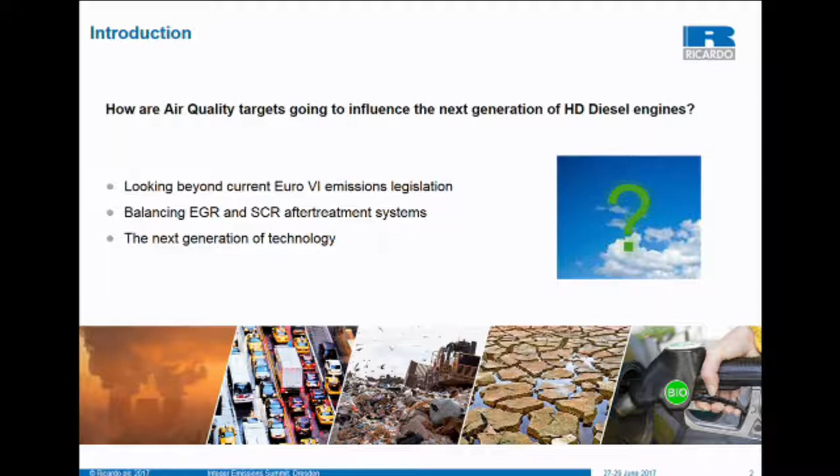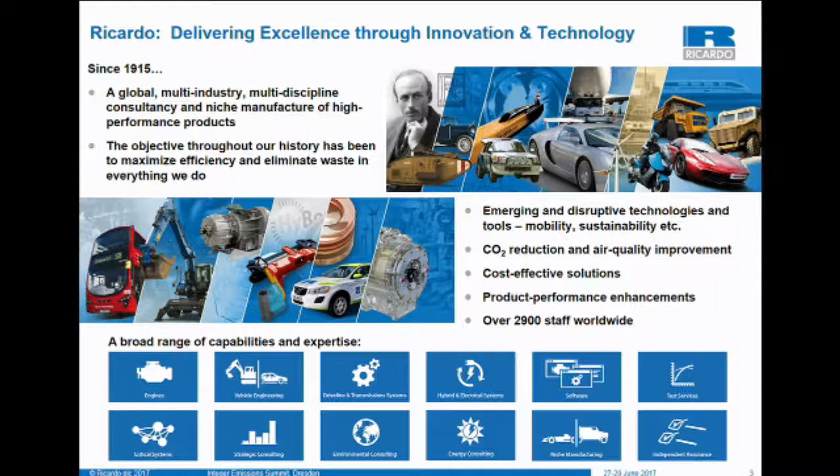So over the 102 years the company's grown somewhat, now nearly 3,000 staff worldwide, and we don't just focus on the traditional consultancy of engines and vehicles and transmission design development. We've also covered environmental and strategic consulting, for example. And throughout our history, we've focused on delivering these innovative solutions for addressing the global problems of energy, transportation and scarce resources.

So let's take a look at the current air quality legislation, current situation and the challenges it presents for the heavy-duty sector. So it's well known that poor air quality is harmful for human health. So within Europe, several thousand deaths every year are attributed to pollutants such as NOx and particulate. So it's a very real problem in the developed world. And it's not just human health that's impacted by these pollutants, but the wider environment as well.

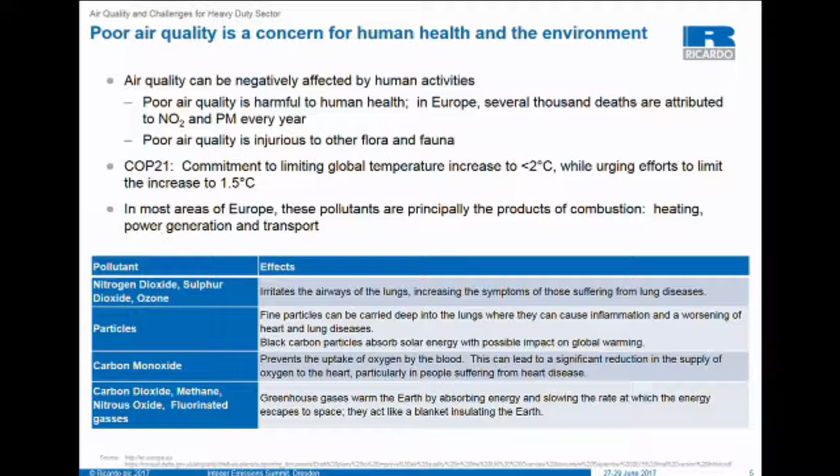Coupled with that, we have the COP21 agreement, which is an international commitment to limit the global temperature rise, and with that will come some greenhouse gas regulations. Clearly, recent announcements by President Trump to withdraw will have some impact, but let's assume for the sake of this that there's some commitment from the rest of the world to keep going with that. In most cases, these pollutants are principally the product of combustion, so the sources are heating, power generation, and transport.

So within Europe, there is air quality legislation in place to deal with this, as we're all aware. So the air quality legislation for Europe has specific local concentration limits for NOx and particulate, and failure to comply with this can lead to penalties. Additionally to this, there's the EU National Emissions Ceiling Directive that places upper emissions limits on the total national emissions for a range of pollutants, and that's expected as well to be further revised in the future for even more stringent reduction.

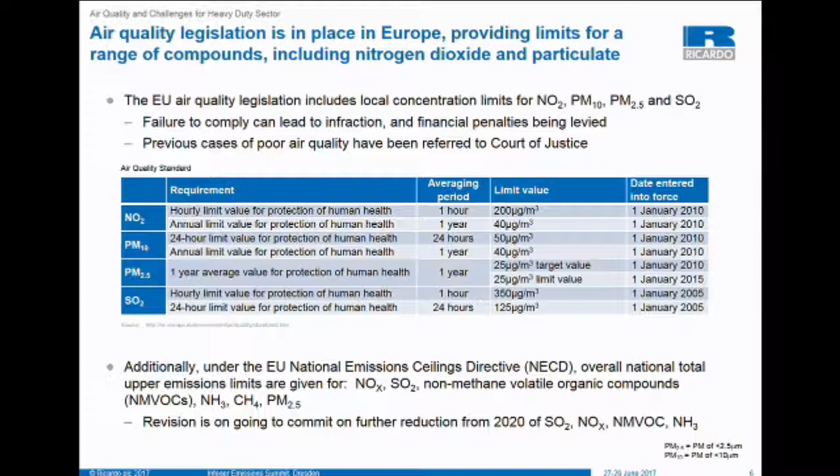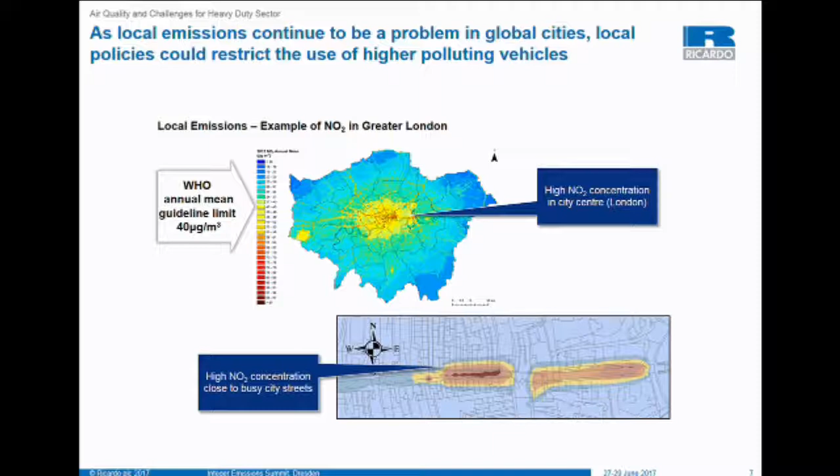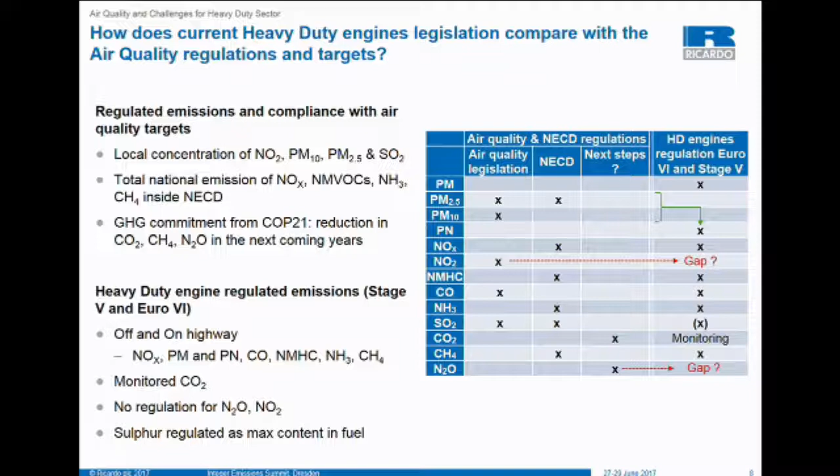So with that in mind, we have a view that future regulation could lead to further NOx reduction and potentially focus on NO2 specifically for heavy-duty vehicles.

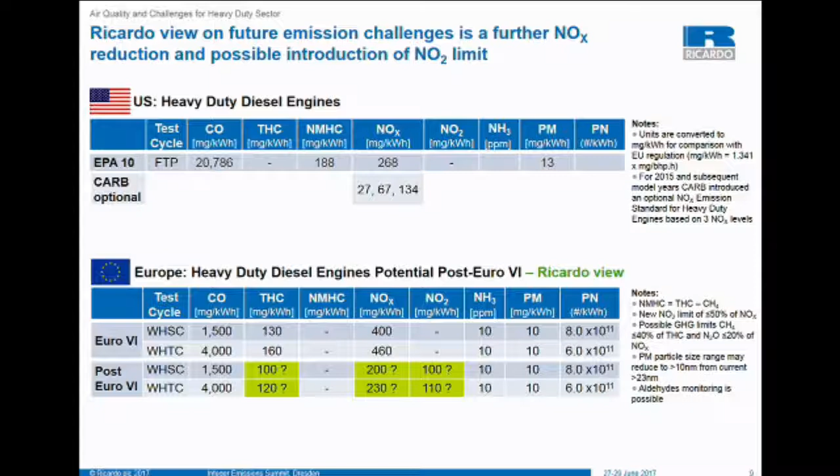Taking that on board, we've been considering what technologies may be required to provide the emissions solution for engines beyond that current Euro 6 level, and looking towards that CARB ultra low NOx level. So I'm going to present some of the ongoing research now.

So it gives you some clues to the type of technologies we may need to look at to address that, whether it's better control systems or advanced dosing systems.

Also within the FTP cycle, similar to the NRTC, the cycle starts from cold, so there's a warm-up period, through which the SCR system isn't able to function efficiently, and therefore there's a risk of higher NOx emissions during that period. So clearly, future technologies that look to reduce that warm-up time would be beneficial, as well as other technologies that may seek to trap the NOx during that cold stage.

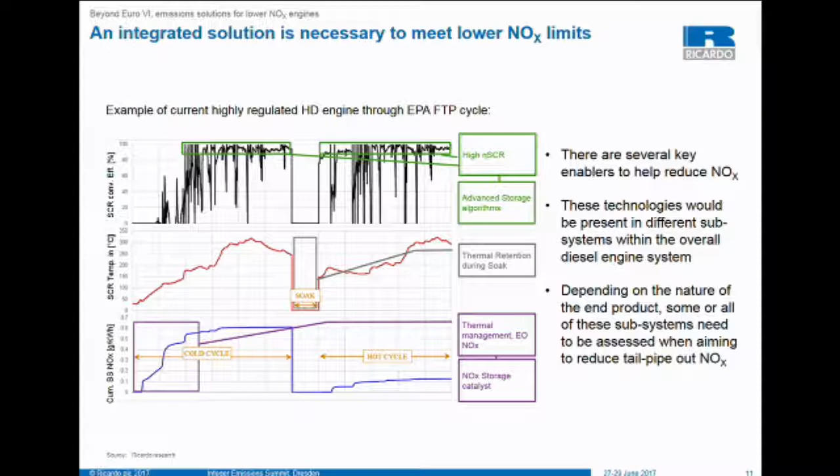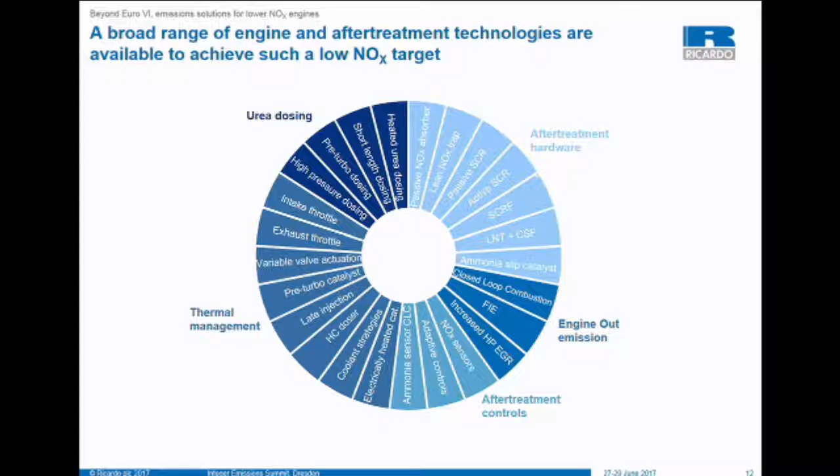So there's a broad range of technologies out there, ranging from further reduction of engine-out emissions through after-treatment and dosing technologies to improve their efficiency, as well as thermal management and controls to deal with the variable nature of the cycle and providing optimum efficiency at any given point.

At Ricardo, we've been researching many of these topics, and we're able to present here some of the more promising technologies that we see to provide a solution for the ultra-low NOx levels that we're projecting.

I'm going to tease you a bit here, and present some technologies that are part of our ongoing research, but it's not at a stage yet where we're able to present the results and the details of the specifications. So it's just a taster, and in the future we hope to be able to present some real results about how these have performed.

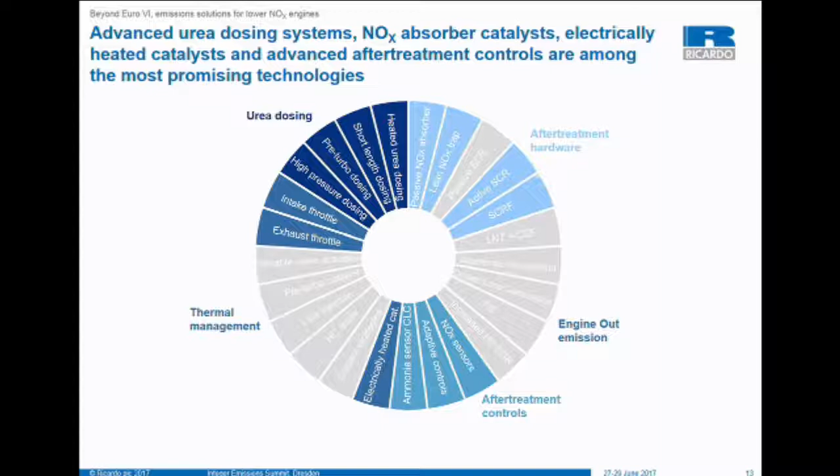Firstly, we've looked at an after-treatment system. It takes a more conventional Euro 6 type system of a DPF with SCR and ammonia slip catalyst, but introduces a couple of key new elements. Firstly, we've included an electrically heated catalyst, similar to the type of product that Watlow have presented at this summit already. The objective of that system is to use electrical power to heat the exhaust flow prior to the after-treatment, such that it reduces the time to heat up the exhaust gas and the SCR to the optimum temperature.

There is an energy penalty for providing that heat, but we're projecting that it's actually a very efficient method of thermal management compared to some other methodologies, and it can provide a significant increase in NOx conversion through the cold portion of the cycle.

The next new element we're considering in this case is a lean NOx trap. This will be used, in low temperature conditions, to trap the NOx, and then we'll need periodic regeneration. It has the additional benefit that it also has an oxidation functionality, so it can displace the DOC.

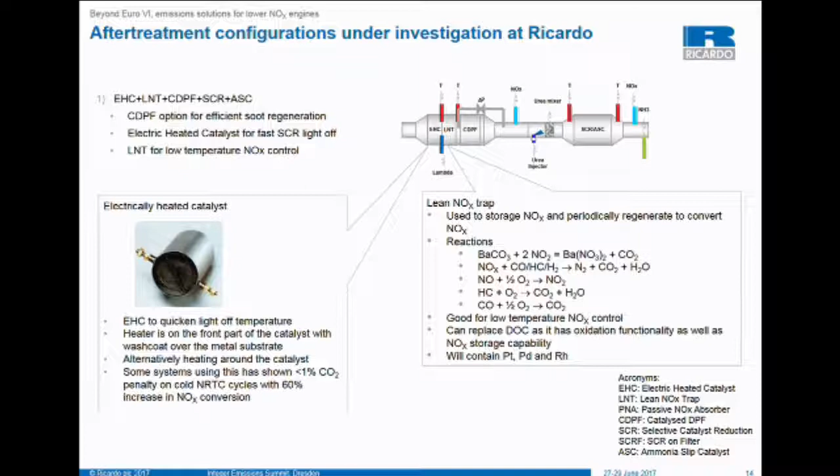The second system we're looking at retains the electrically heated catalyst as well, but now uses a passive NOx absorber. This device will store the NOx during low temperature operation and then release it at higher exhaust temperatures, allowing the SCR system to deal with the NOx more efficiently. Again, this has the opportunity to displace the DOC in terms of oxidation functionality.

In this case, we're actually also testing it with an SCR on filter rather than a DPF followed by SCR. This provides the added advantage of bringing the SCR system further upstream in the exhaust and exposing it to higher exhaust temperatures.

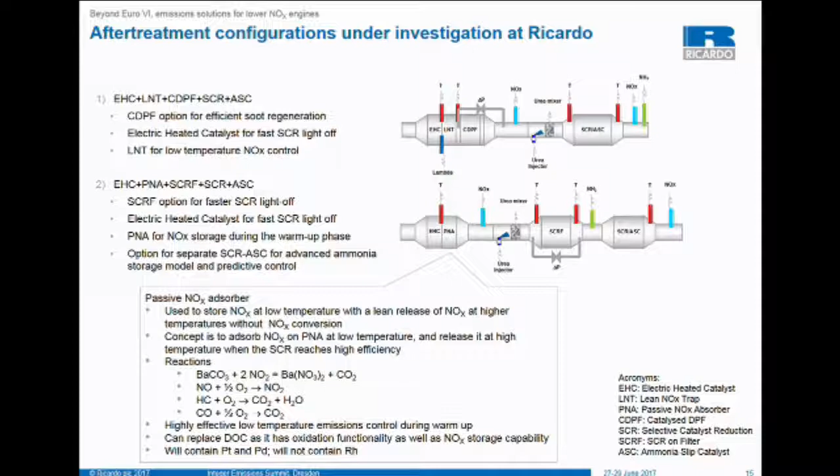The third after-treatment system we're looking at is a more conventional, more simplistic SCR-ASC system, but we've closely coupled it to the turbine outlet. The benefit of that is it reduces the heat loss prior to the SCR system to reduce the warm-up period.

But it requires the urea injection pre-turbine, which gives the opportunity for excellent mixing of the urea in the exhaust gas flow. This could be a very compact and lower cost system than the others, but obviously may not be the most practical in all applications where it's not possible to closely couple the SCR system to the turbine outlet.

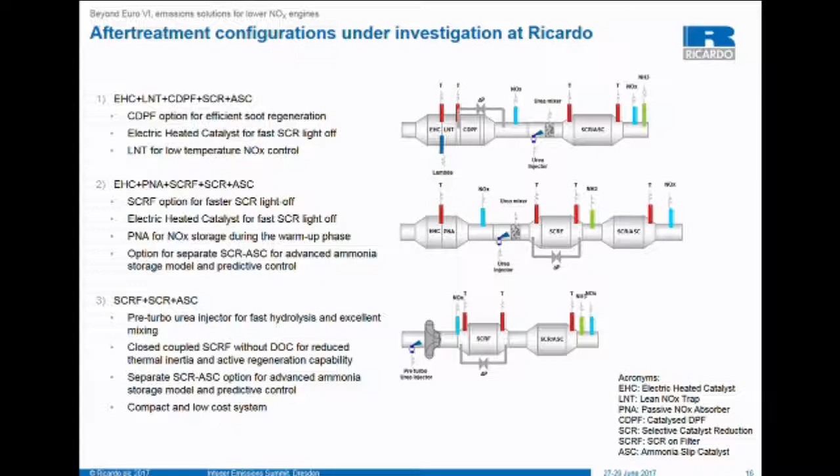We're also looking at advanced urea dosing systems, which include heated dosers, high pressure dosing, as well as alternative geometry dosers that seek to reduce the length.

I guess the overall objective between these systems is to improve the speed of the hydrolysis reaction, and also reduce the overall system length, again reducing heat loss, so that we can present at higher temperatures to the SCR quicker.

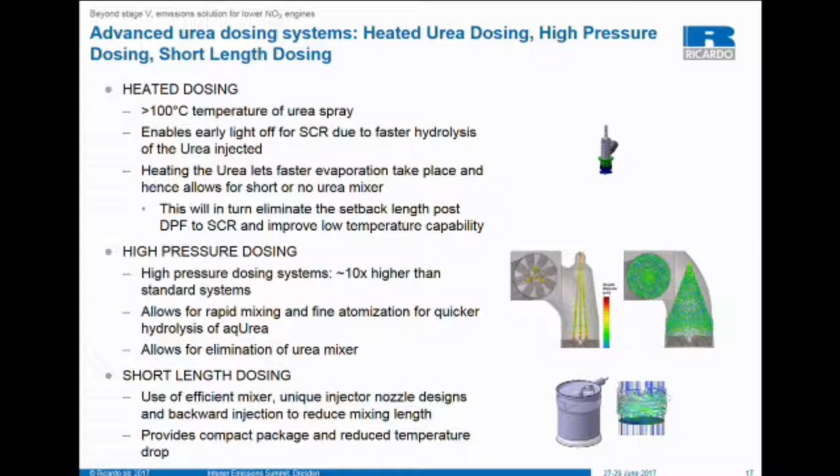So some of these systems we're looking at here, in building blocks, are providing some very high conversion efficiency and potentially some very low NOx outputs. Depending where exactly the next phase of legislation takes us, it may be that the SCR system or the engine and after-treatment package as a whole becomes less reliant on EGR because the SCR system is so efficient. So there's an opportunity to optimize EGR use.

Best total operating cost has to consider the cost of the AdBlue fluid, and depending on the balance of cost between fuel and AdBlue, the trade-offs always suggested that a moderate level of EGR is optimum. From a CO2 point of view, it generally tracks with the fuel consumption, that lower EGR is also better for CO2.

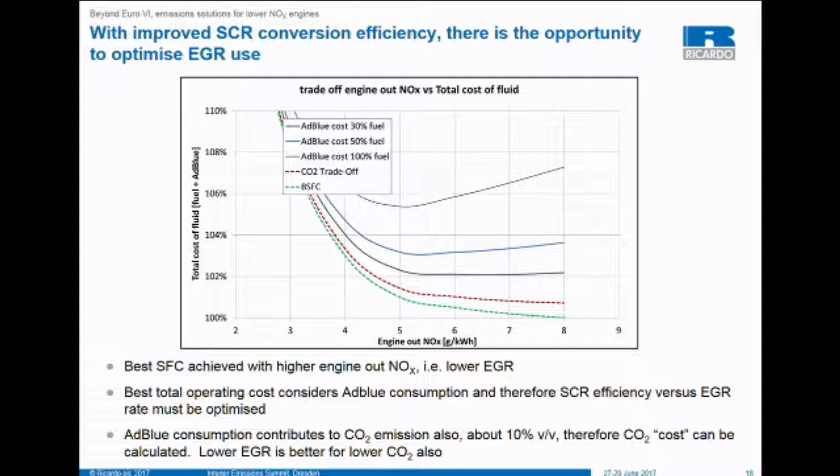At Euro 6, there are products on the market that don't use EGR, and we've seen a growing trend for that at Stage 5 also. Clearly, removal of the EGR system provides some massive advantages to the engine in terms of cost, packaging, reliability. But the total system has to be balanced against what the demands are on the SCR system as well.

Just one comment we'd like to make through the assessments we've been working on here is around fuel consumption. It's an interesting parameter that maybe isn't so straightforward to answer whether EGR or no EGR is the best solution. Clearly, from a volumetric efficiency point of view, going non-EGR provides some advantages.

The question really comes to how efficient your SCR system is and how high the engine out NOx would be without EGR, or whether you need to implement some level of timing retard to control it, and therefore do away with some of the advantage you're gaining by not having EGR, as well as how you're going to implement any thermal management and whether that has a greater energy cost than the EGR system.

So it's a complex piece, and I think we're certainly finding that as cylinder pressures are being pushed higher and higher for the sake of efficiency, the consideration for whether a little bit of EGR gives the best solution for fuel efficiency is certainly there.

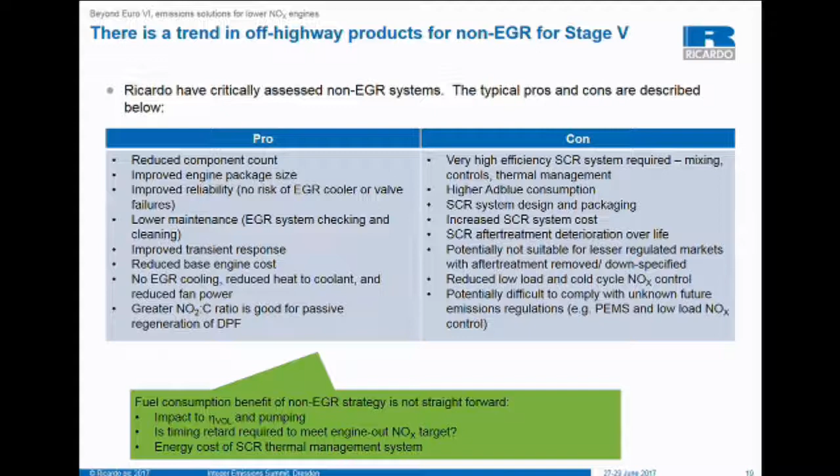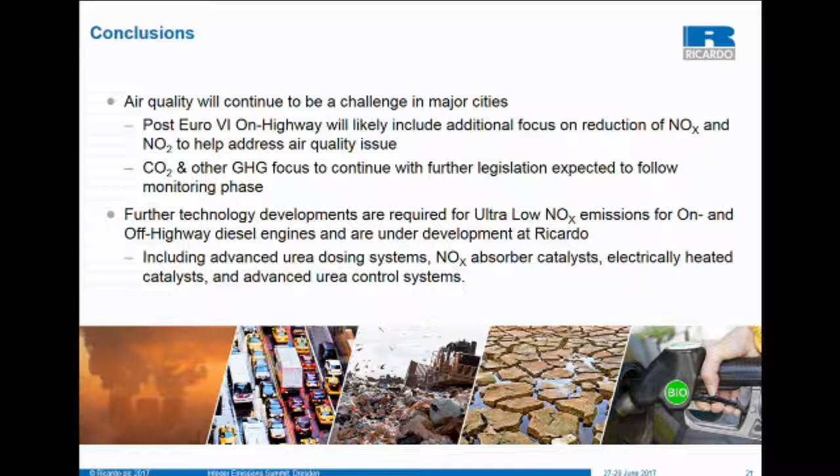Hi. Yeah, thanks, William. One first question.

Sure. You showed those technologies under investigation beyond Euro 6. I'm particularly interested between the one with the lean NOx trap plus SCR or the PNA plus SCR - how do they compare in terms of efficiency and cost as well?

I guess I'm not really able to give an answer to that. In terms of efficiency, I think our simulation has shown promise for both these systems. We're now moving into a test phase, and that's where we'll get some real data, but it's just too early for us to actually make a comment on that.

Again, from a cost point of view, at this stage of our research, we've steered clear of compromising the solutions we're looking at based on cost. Some of the technologies we're looking at aren't always fully developed in terms of being production ready, and therefore not representative from a true cost point of view at this stage.

Okay. There's one question here - mainly thinking for passenger cars, when we have LNT, it's mainly for when you have a smaller engine, because from the moment the engine becomes a bit larger, the size of the catalyst would need to become larger too, and then it becomes much more expensive.